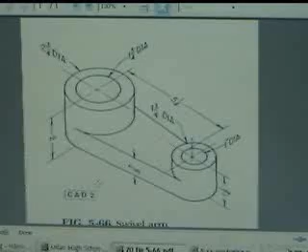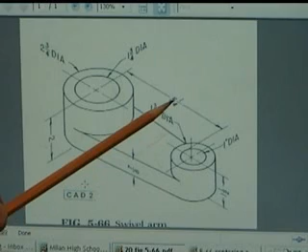Alright, we're looking at figure 566, and some important components to notice on this one would be the diameter sizes: a 2 3/4 inch diameter for the biggest circle, a 1 3/4 for the inside circle. From center point to center point, it is 5 1/4. The big circle here is 1 3/4, and the one on the inside is a 1 inch diameter.

It's a 7/8 inch thickness when we get to that front view, but we will start off by drawing probably that top view once we get our boxes centered for our 2-view drawing. Alright, we have already done the centering worksheet, but I'm going to go ahead and put the measurements from the centering worksheet on here. Over 1 1/4, over 7 1/2. We're coming down 5/8. The actual part is 2 3/4, a 1 inch space, and a 2 inch actual part size.

Run all these lines across. Notice again that I am not going clear to the title block because I'm going to have to erase out some of these lines anyway. There's that direction, and go up and down with it. So right now, this is my top view and this is my front view of those particular pieces. I'm going to start off by drawing the top view, and I got a couple of different circles that I got to place in here.

The biggest circle is a 2 3/4 inch diameter, which means I cannot use my circle template because the biggest one is 2 1/4. So what is half of 2 3/4? Half of 2 is 1. Half of 3/4, if you double the bottom number, is 3/8. So if I set my compass to 1 3/8, I'll be able to use that, but I need a center point here. So I'm going to measure over 1 3/8 and up at 1 3/8 to get my center point.

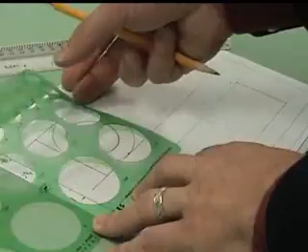Here's my 1 3/4. Now next I got to transfer my center point over this direction, and my center point is 5 1/4 over. So if I bring this across, 1, 2, 3, 4, 5 1/4. All I did was use my straight edge, 5 1/4 straight across to get to that center point.

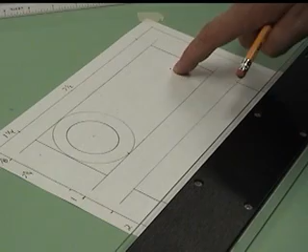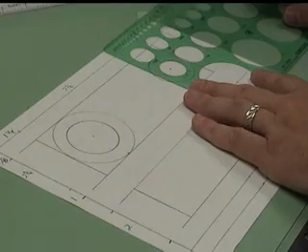My biggest circle diameter is once again 1 3/4 here. So I will use the 1 3/4. If I line it up correctly, the circle on this one should line up with this outside edge of my box, and it does. My inside circle is 1 inch. And now at this point, all I'm going to do is line up a straight edge of some sort, basically from this point to this point in there, drawing it up. And like this point to down here, the tangent edge, basically going a quadrant to a tangent.

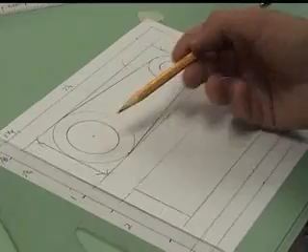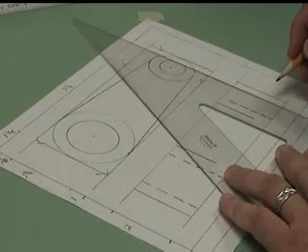And my top view is now finished after I erase all those out of there. So once I erase those out of there and darken it up, the top view would be good. Now I got to transfer each one of these quadrant points down. That one's already transferred down because it was the outside edge. This one here is going to be transferred down, and I'm going to make that a hidden line right now just because it is inside the object. Pull this one down. This is also inside the object, so I can make that one a hidden line. And that outside edge is the one that is previously there.

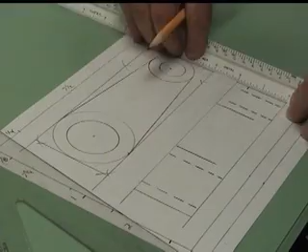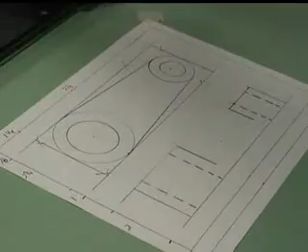Now we got to look at the drawing to figure out how thick some of these parts are. The overall size of this one is 2 inches, so if I measured from there to there, that is 2 inches. The height of the smaller one is 1 1/2. So I'm going to measure up 1 1/2 here. Draw my line across, which means then I have to erase out everything above it. And now, how thick is the part that connects them? The drawing says it is 7/8. Use my piece here.

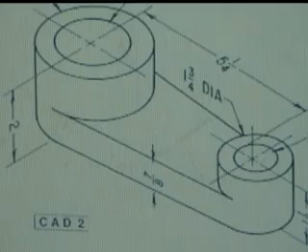Now, to finish this drawing out, I'm once again erasing up to that 7/8 of an inch mark, but there's only one thing left. And once again, it's what I call the butt crack, which comes out like this. And if we look at the drawing here, what I mean by the butt crack is this point right here. So this is the butt crack that we got to put on there. This line does not stop at that quadrant, it comes in a little ways, as well as it does right there.

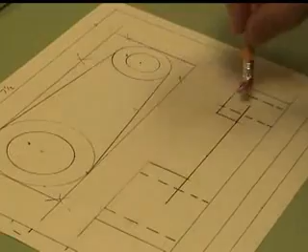So with that said, how do we get those? Where the line intersects right here, we can bring it down, kind of make a mark. Same way over here, where it intersects at there. And then we can extend this line to go to those points. And now we just got what I call the butt cracks in there. Now, after erasing it and making it look good and darkening up the lines, figure 566 is now completed.